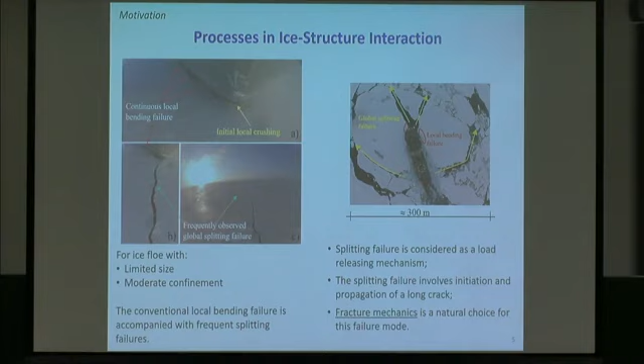So what can we then see? We see many different failure modes, not just one. If you look at the hull in the contact zone, we have bending failure of the ice. At the stem, we also have some crushing. In addition, there is splitting and circumferential cracking — all these things happening more or less at the same time.

And you see a crack running forward, as you see here. So if I take an example here from Oden in ice, you see a floe. This icebreaker is 108 meters long, so the floe is 200 plus. And what can you see when you are breaking forward here? You see a crack developing here, and another one here.

But what you should also recognize here is that there is a lack of confinement on this floe, which means that in the interaction zone, the stress field must clearly see or feel the boundary conditions. In addition, we have a local bending failure, as you see along the reamers here on the vessel. So I would say conventional local bending is accompanied by frequent splitting failures, as we see. And I'm more and more convinced that fracture mechanics is a natural choice for the failure mode here, so it's becoming more and more important.

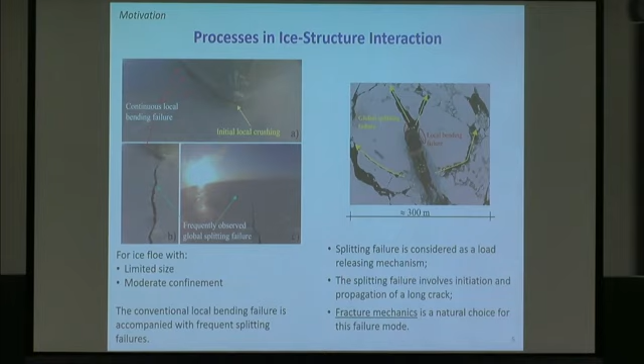And in our case, we are talking about this from the perspective of sea ice, which of course has salinity. It's more porous than freshwater ice, and so on.

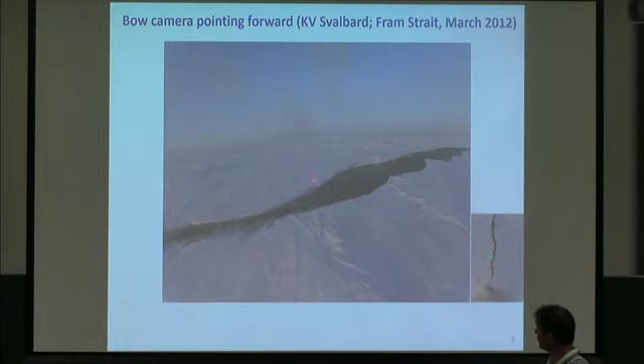On this slide, you see the bow of the icebreaker, and what you will see in the next seconds is a crack running from the bow here when we run into this floe and strike forward. So to let you understand, this is a bow camera pointing forward, similar to what you can see here. This is not the same crack.

I run it once more so you can better observe. I haven't exactly estimated the speed of the crack here, but we are talking more than 10 meters per second. I think we are talking about 15 to 20 meters per second on this crack running.

And what was characteristic, and what I said, was that there is a lack of confinement on this. It was just as you saw on the previous slide.

Now we are running into it. And you hear the rattling, can you hear it? And then we come - the temperature here is low. This is up in the Fram Strait in 2012. But what I would like to say and stress is that I see this kind of failure both in cold ice and in warm ice. So even if we had minus 30 here, this could very well happen at minus 5, minus 8, and so on as well. So that's what we see.

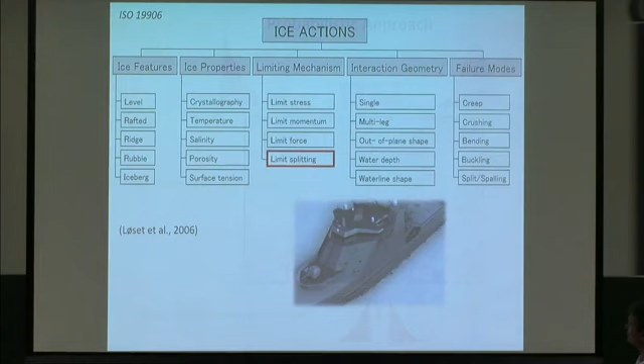So what concerns me with ISO, and I'm in one of the working groups there together with Bob Frederking and others, is that if you think about loading from this kind of perspective - say you have a probabilistic approach here, with a certain parameter which affects you, a distribution of that one, another one, a third one, and so on, and you need to create a parametric model here - what happens very often is that you take a deterministic model which includes one failure mechanism. So it means you go back and choose a failure mechanism, and then start calculating from there.

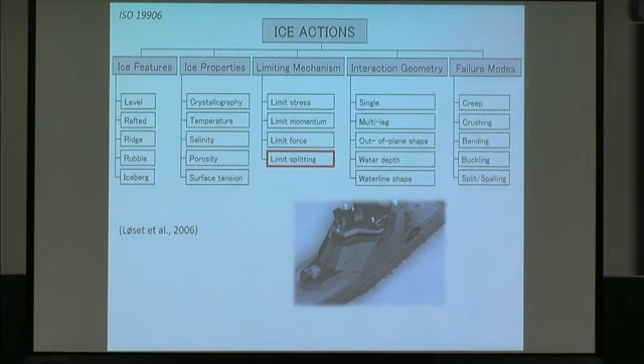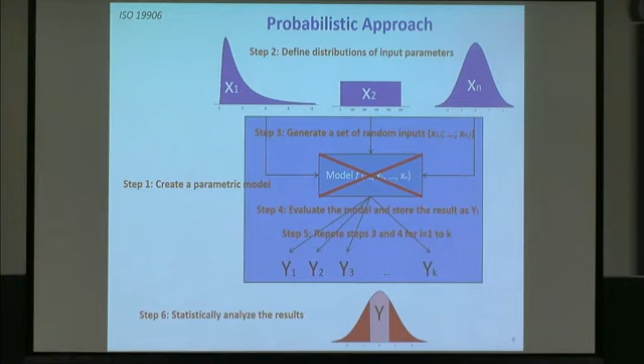And that's completely wrong, according to my vision and understanding, because that's not what we see. We see the combination of different failure mechanisms occurring more or less at the same time. So I would say the problem with ISO is that they have no proper model considering that. I won't go further into details here in this talk, but for me it's at least a major concern.

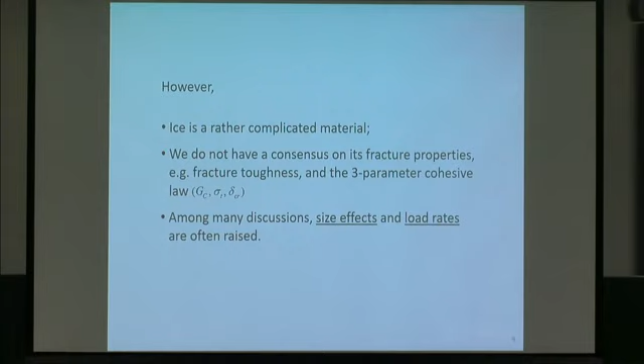But however, when we talk about ice and fracture as we are doing here, ice is a rather complicated material. That's clear, and we know that quite well. And if you also look at cohesive laws, or a three-parameter cohesive law with fracture energy, tensile stress, crack opening displacement and so on, then we do not fully agree on this, for sure. Among the discussions, we have size effects - how much can we rely on what we see in lab compared to full scale, and so on. How well can we do things in full scale? That's another part of it. And then also loading rates - is there any dependence there or not? So there are many things to discuss, which I will touch upon.

So the test we were doing, I will go a little bit into the test design. First of all, you have to consider size requirements here, like the length in the cleavage direction of your test divided by an average grain size, for instance, exceeding 200. I think that's common to say it should be more than that.

We could also think about the length here in relation to the characteristic length, as you have, and relate this to Mulmule and Dempsey in 2000 and so on. This is typically what has been considered there. So when designing the tests, we looked at a lower and higher value for the fracture toughness, leading to lengths in this scale, or if you go for a higher value, this is by Erland, and this is by John, for the fracture toughness, taking a relatively conservative value.

We would say that we need at least 3 meters for our experiments if we should think in this direction, as we should. When it comes to the loading rate, it's a little bit the same considerations with speed of what you should apply, and we went for different ranges because beforehand we didn't know exactly what we could need, for instance of temperature in the ice and so on.

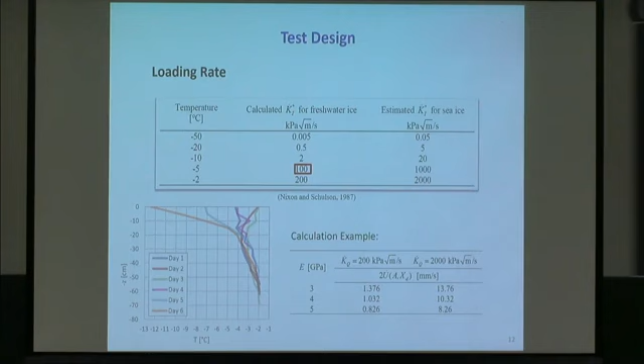So here is a profile of a typical temperature we had in the ice, which in this case for these tests here were about 60 centimeters thick.

Another thing I would like to say is that I'm very much in favor of a stiff system when we are testing, and we know that there are several jack loading systems based on hydraulic systems. If you should do that properly, you probably need to have a closed loop for the feedback and so on.

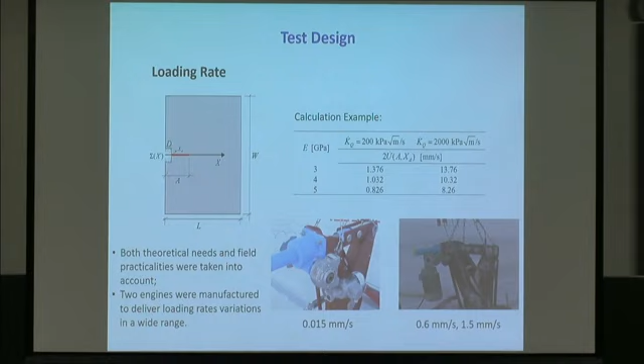So I've always gone for screw jacks with a high capacity, for instance from this engine here until the loading device, which is below here. We have a gearing of 1400, so I could actually turn this more or less with my finger, and in that case I know it will be quite stable in the speed, or independent of load. So we had speeds here from 0.015 millimeter per second to 0.6 to 1.5, so a factor of 100 from the lowest to the highest.

So what about the field tests in itself? I mentioned Spitsbergen here. This is the island, and Longyearbyen is located here. Our test site was in the south, about 60 kilometers from Longyearbyen, so we had to drive with scooters over here and do testing.

If I go 15 years back in time, I could have done tests here. But due to what we see, whatever it's global warming or whatever the cause of it, I don't discuss, we see that we have no chance to do proper experiments here any longer. We have no stable ice during the winter.

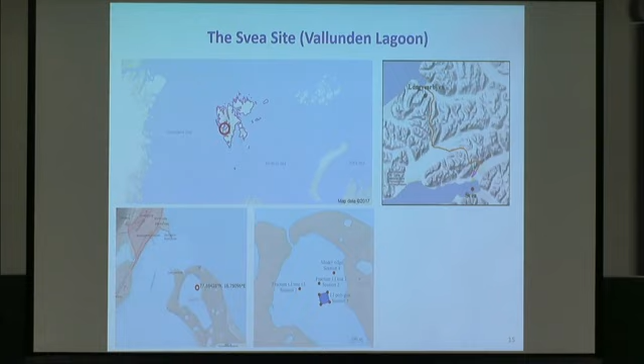And we went even further, because driving over and doing experiments in this area, we went into this lagoon, and it has exactly the same salinity as the sea outside, about 34 parts per thousand. No rivers flowing in here, of course. Then we have really stable conditions, which we were heading for.

So to come to that site, it looked very much like you see here, snow on top, and you need to perform something here which is both efficient and reliable, and also considering safety, which is quite important for us.

So here a little bit of the team. I think you can recall Yuka and Wenjun and John Dempsey. That's a part of the team which was there in '16. We started in '15, but we had some failure in the system there. So it was first in '16 we got proper results. And we can also add the team in 2017 with the equipment we applied.

So how did we do the experiment? I'm always in favor of having things where you don't need to rely on equipment that should be submerged. So we had a special design jack where everything related to the loading rate, measurements, and so on were above water. In front, we made a notch here in the floe and lowered the jack in so it could expand. I will show you that a little bit later.

Measurements were done of the crack mouth opening displacement here, and also what you have at the crack tip. So by keyhole test we know relatively well where the crack would go, and we did an experiment, and that was the way we designed it.

I mentioned this and I would also like to stress another thing. The device did not load the floe here. We had a crane up here, and wires or ropes going back, so we were sure we didn't impact or affect the loading on the floe.

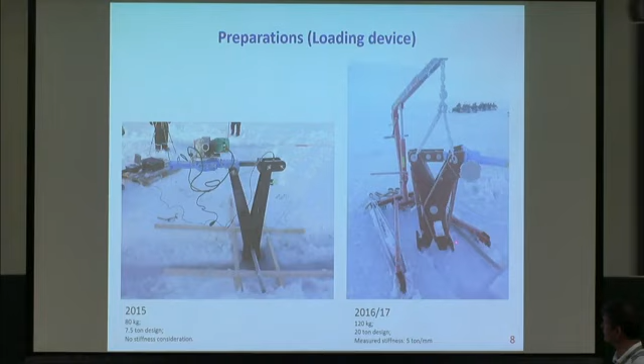So if we look at this jack, 2 plates, 200 millimeter high and 150 wide, with the jack working here and also a load cell, so we could easily lower this into the ice and start the experiment.

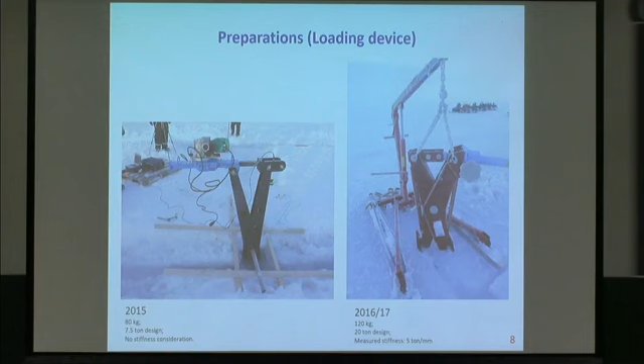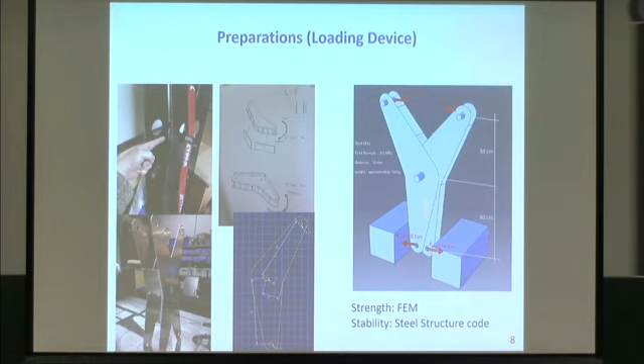It's also a matter of time. If you have an experiment which lasts very long or a slow procedure, after cutting the notch and preparing for the experiment, you will definitely affect the thermal conditions in the test area. Learning a bit from the preparations and from some experiments prior to this, we developed a jack here where you have the loading plates, and we could pull here instead of push, with a steel structure we designed to be efficient.

So what about the execution here?

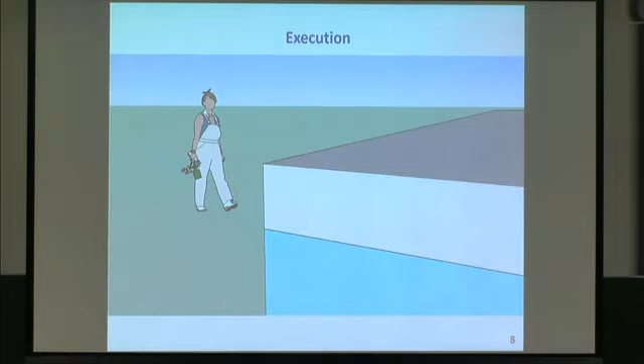Removal of snow, that's the first thing, of course. You need to have a bare surface, with different sizes, since I mentioned size effects if we want to study them.

Then there's also the cutting sequence, as you can see here. Typically this is 5 meter in the crack direction and 10 meter wide on the other side. It's important to do this in a way that is relatively fast.

A test was typically run within about 2 hours after cutting here. You can wonder why we could be so effective - I'll come back to that. Here you see this from another perspective.

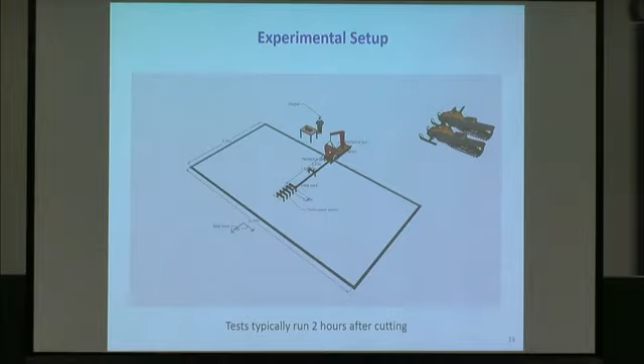And the instrumentation. So first, cleaning the snow - Jukka volunteered here, doing quite well.

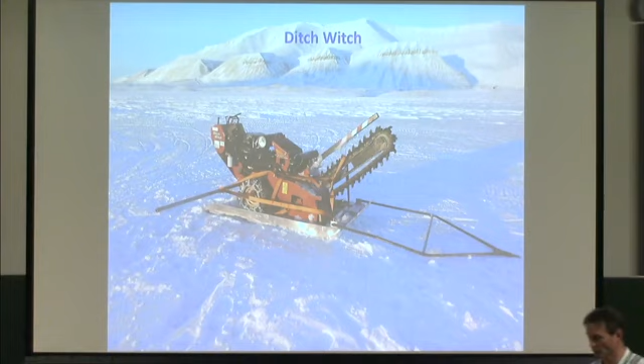But the most important thing here was an idea we borrowed, and we are really grateful for that, from John - a ditch witch. This was the major thing for us, meaning we could cut the ice at about walking speed.

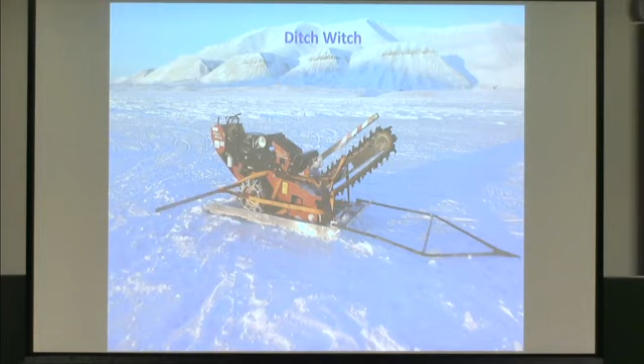Here is the device. We could pull this with a scooter from the land area over here. It's 520 kilos, and we could do it safely, chains on and so on. That was really great.

Then, prior to starting the real testing, we made a notch here - not for the crack, but for the jack to go into. A keyhole is made up here, and we were ready to do our first experiment.

This is back in '16, in order to see where we could expect the cracking - where we would expect the c-axis to be, or the basal plane, and so on.

Another important thing was this device we developed for measuring the crack opening when it starts, when you get the stress out here and the crack starts running forward. A neat device installed, mounted on wooden sticks in the ice and frozen in, so it was quite stable.

What about the instrumentation? Data logging at 16 or 50 Hertz - we found that could have been better, so we increased this to 1000 Hertz in 2017. We had loading rates from 0.015 millimeter per second up to 0.6 and 1.5 millimeter per second displacement.

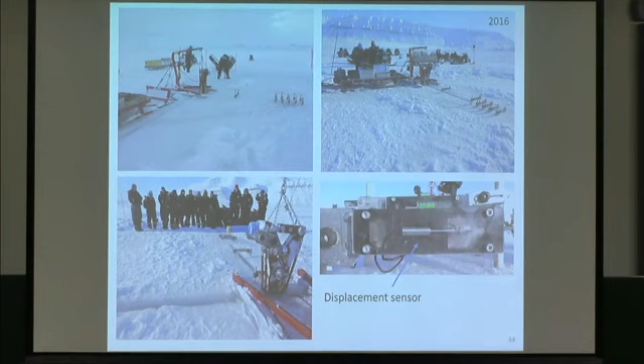We discussed a lot whether we should use optics, but we know that in Svea it's a damp place in relation to wind, meaning blowing snow along the surface would cause disturbance. So we went for a different device here, well protected, and that was a success, I would say.

Success and success - we always have to pray a little bit before starting, and Wenjun was hoping for the very best, as you can see here.

Yes, and then following up on the instrumentation is of course very important there.

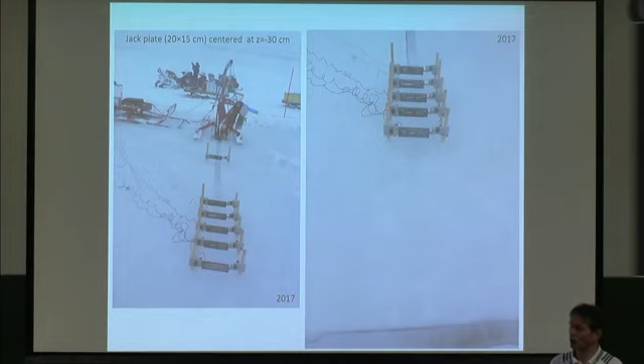With a little less light, but I think you're still able to see the crack running through the gauges here and up to this point, in this case when I took the photo, and later on it would proceed. But we could also stop a test in order to, let's say, capture the crack tip.

An example on that, this sequence is the following. We have a stable crack growth all the way. In this case, we stop the test, and this is not a keyhole test, by the way, for those who may think so.

This is just a sample, 4-inch, taken out from this section here, and what you can see, but it's not taken out here, is the crack tip which stopped here when we unloaded or stopped the test here. We didn't unload, we just stopped the test with the crack tip included, as we may consider here.

So what do we see there? This is the core which we have just pulled out here, and so you see the skeleton layer here, which is the lower part of the core, and we have the top here.

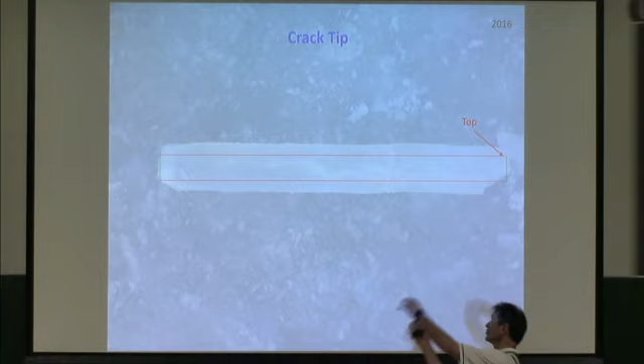So if you put the goodwill in here, you can see the crack here all the way from the bottom to the top of the sample. We stopped it just before and put the drilling in such a way that we kept this as one piece. So now we have a vertical core which we have just taken up here with the crack in, and then just put it on the ice and make this photo. So this is the core which was taken out from here.

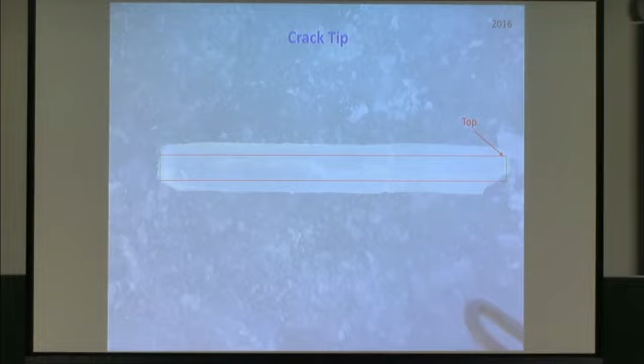Before you start the experiment, did you do anything to sharpen the tip? The sharpened? Yeah. I think I'll come back to that in a minute. If not, I will tell you about it.

So what can we say here about preliminary results? If you now take as an example... okay, I should probably immediately answer to your question. What we did here, if you see the jack is here, I can look at this one here, and the distance over here is 5 meters.

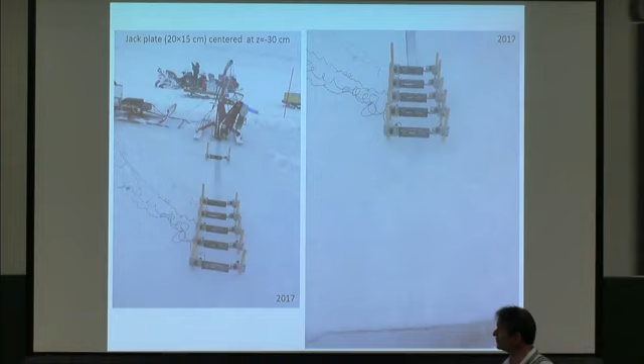So we used the ditch witch in to a certain distance. Then we used a chainsaw a little bit further, and then we went over to a handsaw, which was about 1 to 1.2 millimeter wide. And of course, it's very, very important that that is sharp, as we were considering.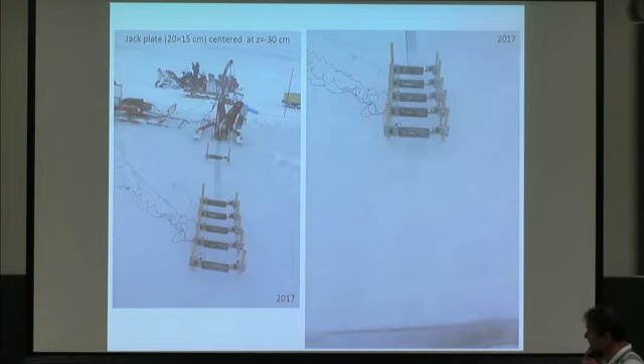So there was no way you could run this all the way. So we stopped well before we were afraid of interrupting the whole thing.

Wenjun, do you know where the video is on? What? Okay.

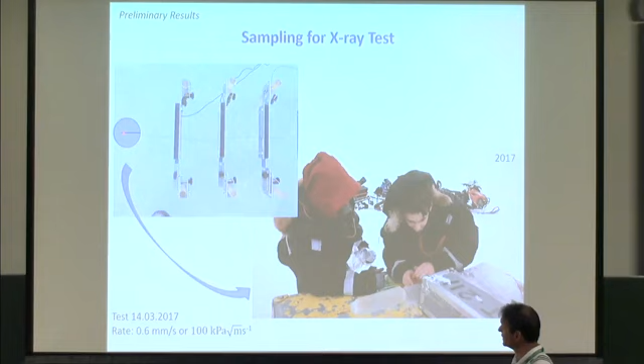So that was about the notch. So what you see here now is another core taken from the core tip, including the crack tip. You can clearly see this displacement sensor being measured over the crack, and of course also where you have the loading device.

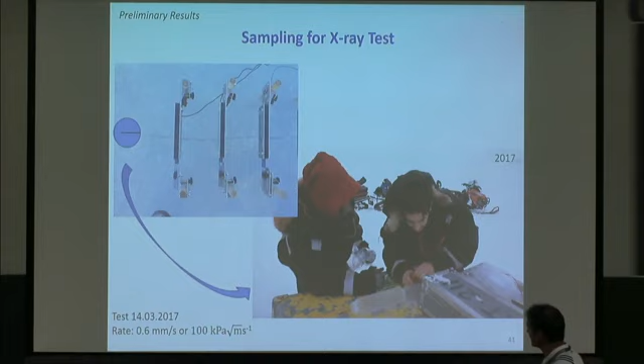For the result you see now in a few minutes, we have a loading rate of 0.6 millimeter per second. And in this case, we have a crack, the crack tip included in this core. So it's the crack or the core sample we have taken from what is indicated on the photo here.

We know, of course, if you start going back to theory here and so on, if you go to microscale wherever all the way down, you can consider the fracturing as breaking of bonds, either covalent bonds or hydrogen bonding and so on. Typically, if this was an ideally brittle material, you could have the fracture energy here related to the surface energy multiplied by 2.

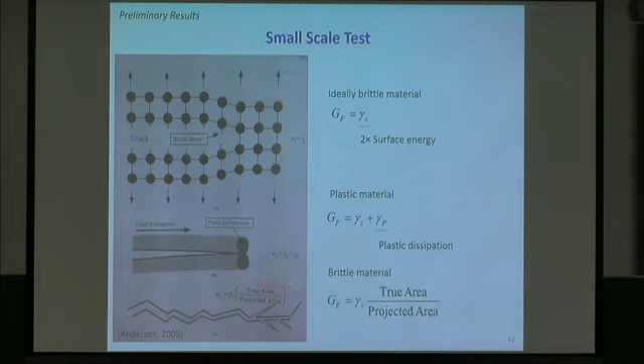But when we talk about a more plastic material, and we can't expect that sea ice is ideally brittle, you more have to consider that there are things happening in this area which is not just related to breaking up that ice you have. You have pore water in there. You have a porosity, which can be also relatively high in sea ice. So it's quite, I would say, quite complicated.

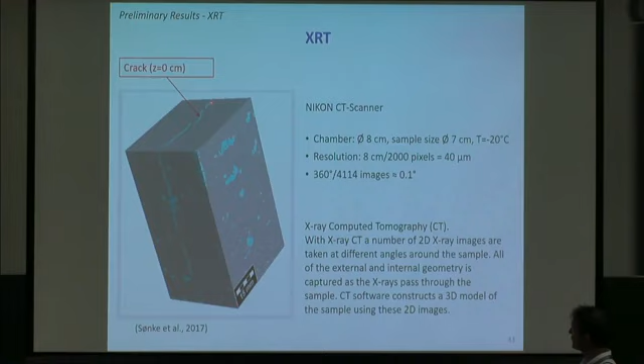So here is, from the core you saw now, here is an X-ray scan. I think this is from the core you saw in the previous slide. That means from the very top here, which is behind this cage here. We have captured the crack, but this sample didn't capture the very, very tip for the one we ran X-ray on. But I will show thin sections where we have that in.

So Z is equal to 0. That means we are on the surface. We had access to a chamber here, diameter 8 centimeter, and a sample size in this case of 7 centimeter over here, run then at -20, and this is of course in the lab at home.

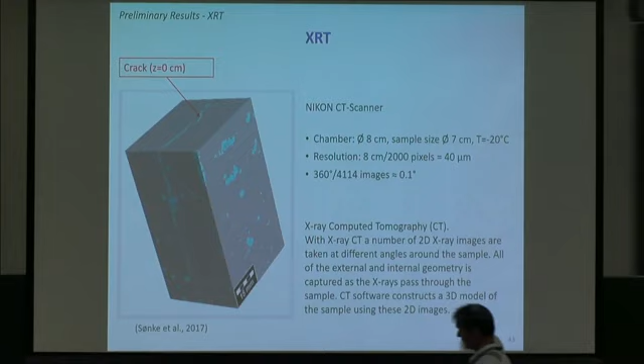And here we could slice up with 2D images which we put together into a surface which tells us something about the crack development and the crack surface. So by 2000 pixels here, we have a resolution of 40 micrometer. And the resolution here is then 0.1 degree for each slide we have in here. So from this, we could get a 3D model, as you can see here.

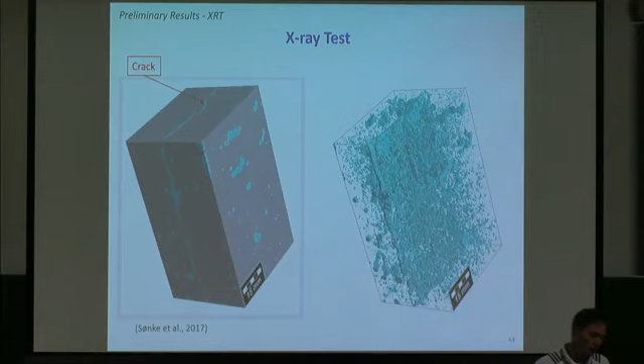You have less impurities, you have less pores and brine pockets in there, so I would expect that could be more plane. So it's developed all the way over here. What you can also see is that there are quite some inclusions here of brine pockets and air pockets as well. So there is a complicating factor. That's nothing to discuss, that's quite clear.

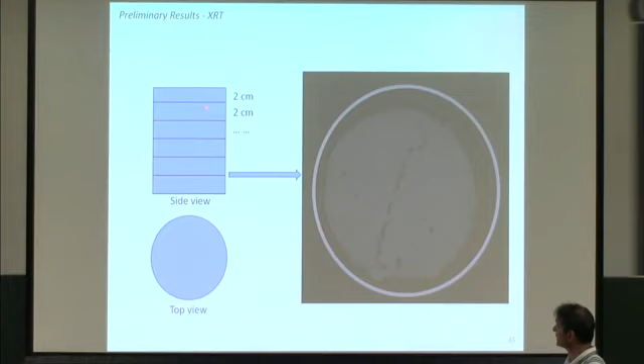If I now take this sample and then take a layer, integrate over 2 and 2 centimeter down the way, you will see a video now where you can see that. So the video will see now going down from the top of the sample here down towards the bottom of that sample.

And what you can look at there is details. If you look here from the top here, you see the crack is running in this way here up through the sample, and you can see here this is clear, the crack is going here, so this is magnified here, and you see also 2 lines going here, so this is a bifurcation here from this point and over here. And you certainly see that this follows weak sections, weak parts of the ice where you have, for instance, brine pockets.

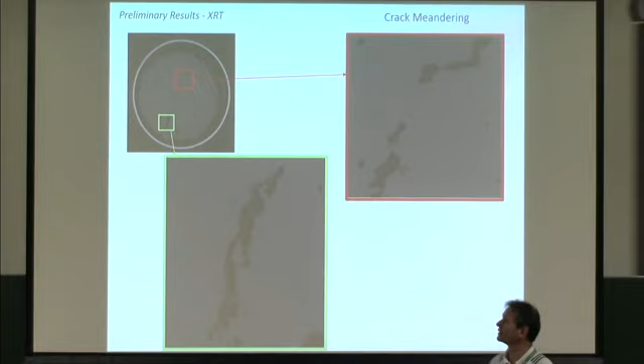We could take another part of this, magnify it as you see here, and you can see the same tendency here. So if I now go layer by layer, 2 by 2 by 2 centimeter down, it will look at, as you see here, okay, the crack is going here. You see also the brine pockets coming up and gas pockets and so on, but the majority is that we clearly can see that it's not fully continuous here.

You have certainly surfaces here that are intact in some way to some level, but then it's broken off in other places and so on. But in totality, of course, you have an opening here. You have an opening here, so it has to be broken.

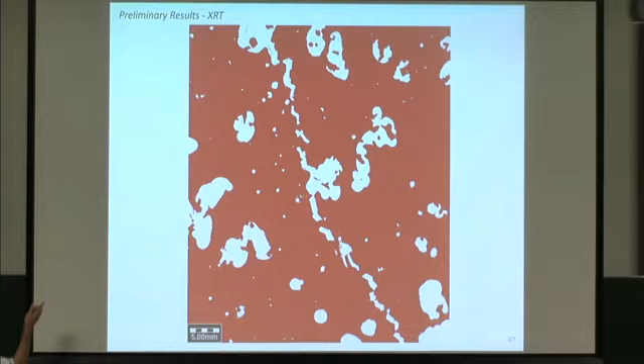And another thing I would like to say is that if you look at a crack like this, now to magnify it a little bit, and now we are diving down, that's what you see there. It is clearly that it's not straight as you think here. You see also deviations here at the crack tip. So just be aware of that.

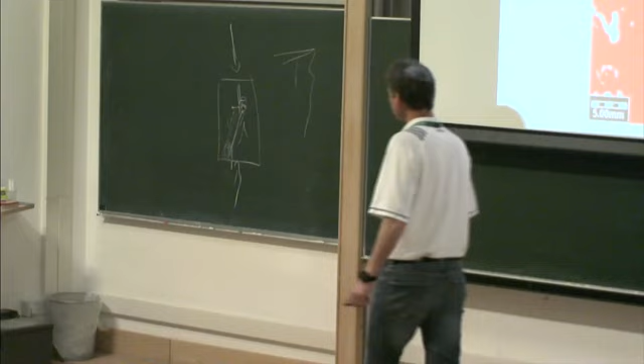So if you take just one thin section, it could be from the top here. It's not the whole story. Be aware of that.

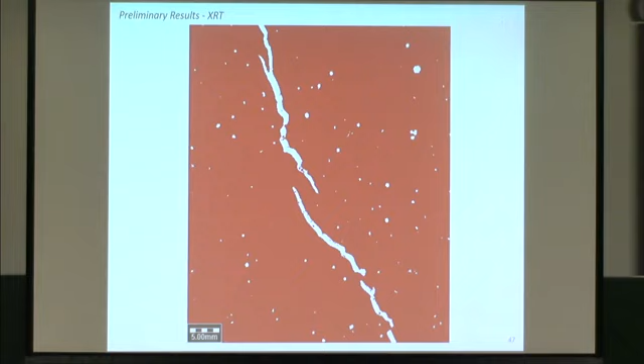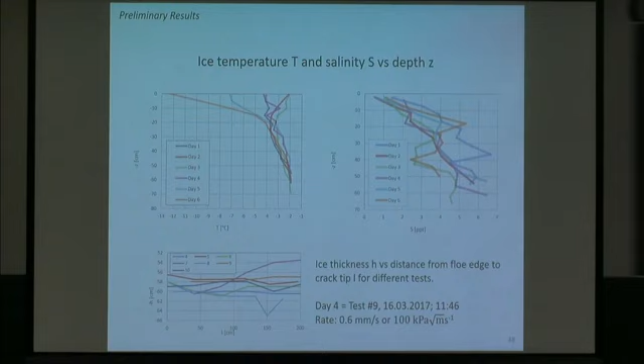If we go and look a little bit at one test here for that could be some thick and thin sections. You see this year and it was actually the same in 2016. The temperature in the ice was relatively warm. We can say that we have an average here of around maybe minus 4 or so. The crack was located here at this surface at this depth, 30 centimeter below. And if you look at this test number 9, we had a rate there of 0.6 millimeter per second and corresponding to 100 kPa square root of meter per second.

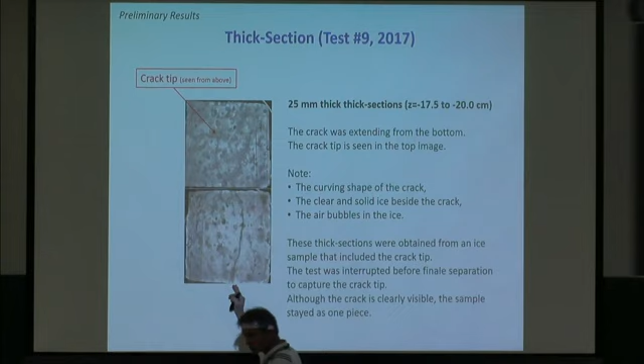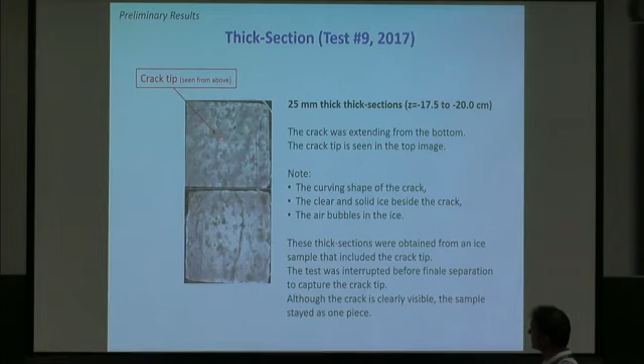Yes, so what can we see here? What is captured in this photo here? We see the crack is coming, running here from the bottom. The bottom means, sorry, from the bottom of the photo. It's running like this, and the test was stopped, or it was stopped in such a way that we have captured the crack tip, as you can see here.

And you can also clearly see some of the porosity here in the ice, the brine pockets and so on. What I can see here is that you can see that ice are fully in contact on sides here. So what can we say here?

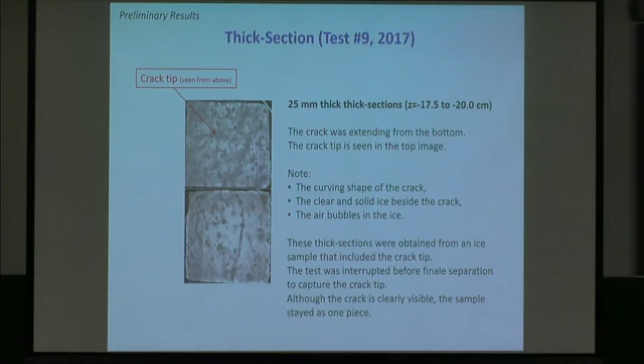Thick section obtained from an ice sample included a crack tip. We interrupted the test, as I say, and we can clearly see this crack being open from this way and forward over here. At this we will also look at a thin section going from thick to thin section.

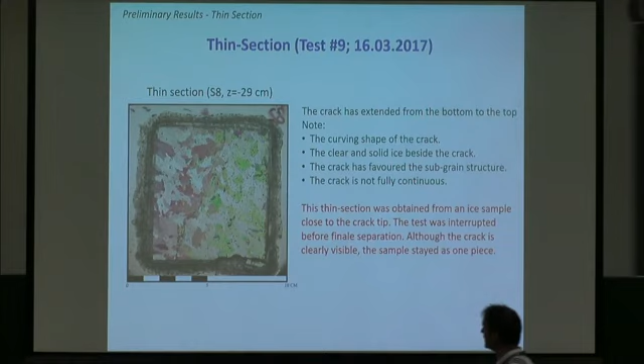At this depth of minus 20, or 29 centimeters from top down, you can see clearly in this thin section the crack running over here. You can also see that it diverts a little bit, goes around, clearly seeking for weakness in the ice. This is very close to the crack tip, so the crack tip is up somewhere here.

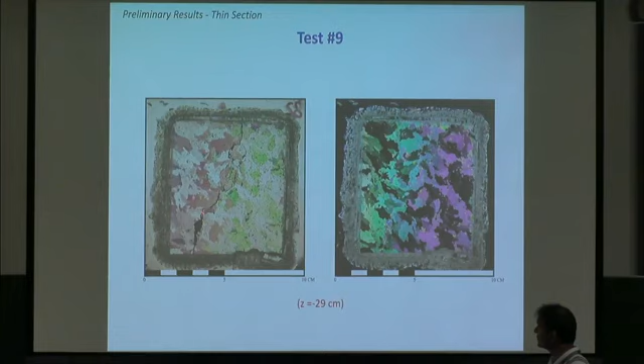We also see that it's not fully continuous the way we see it on this slide taken here. A little bit more information: you see it's quite open here, and clearly you are following pockets in the ice, or weak zones in the ice. You see here it's not bifurcation, I think we have 3 going and coming back together and running further up.

You can see more clearly the grains on this slide. Or if I go into this one, you can more clearly see the grains here. I haven't had time to calculate properly, but we are in the range of 3 to 4 millimeter average size of the grains. There's some statistics here. This is not diameter, this is grain area which is used.

And then we do of course have also information on the orientation here. If we look more closely here, we see the platelets. You can see that this is 1 millimeter over here, and we are now at the same depth. In this case, where this thin section is taken from, we can see that the crack has been running over here, so actually transverse over the platelets here.

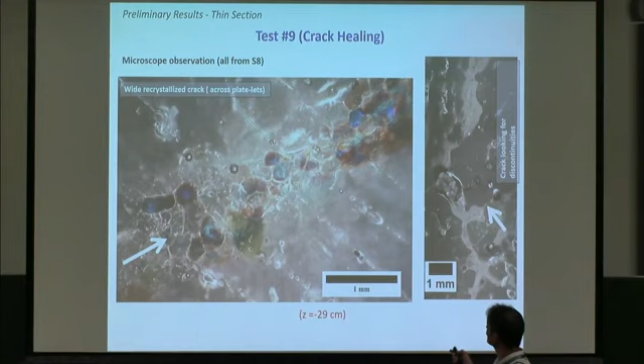But we can also see that it's refrozen. It's healed. As you can see, we have now more or less solid ice here, so there's recrystallization.

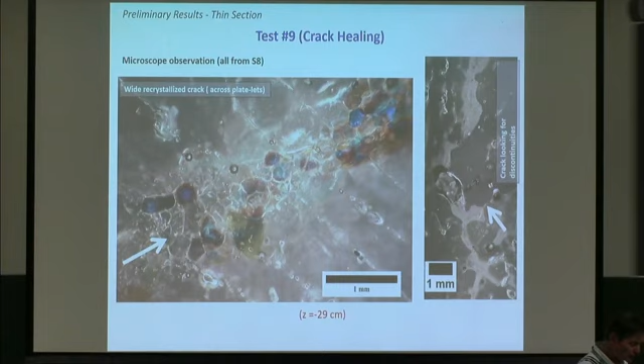If we look into this slide here, we can also follow the crack going around and up here and so on. So as Krzysztof said, the crack is looking for discontinuities in the ice here. This must be very different from fresh water ice, no question, and you can see that here as well. If I take these microscope observations...

We are at the same depth. We can see the crack running over here, and this is a void, a brine pocket, or could be gas as well, running further forward here, and up, probably looking for a weak zone. What you can also see here is that the crack is clearly transgranular, so it doesn't necessarily follow the grain boundary.

And we could start looking into the same here. I think you could get some minutes now, Wenjun, if you don't mind, and then we take the questions afterwards. But I will stay within the time, okay? By the way, there's a break afterwards, so it's not so strict.

These data are so fresh that we always say here preliminary results. We have not published them yet and so on, but of course it's coming.

Jeroen: I have a question concerning your observation on X-ray tomography, your very complex shape for the crack — could it be related also partly to some healing mechanisms between Svalbard and the X-ray chamber? Speaker: For the X-ray, we kept this cold all the way. Healing. So, yeah.

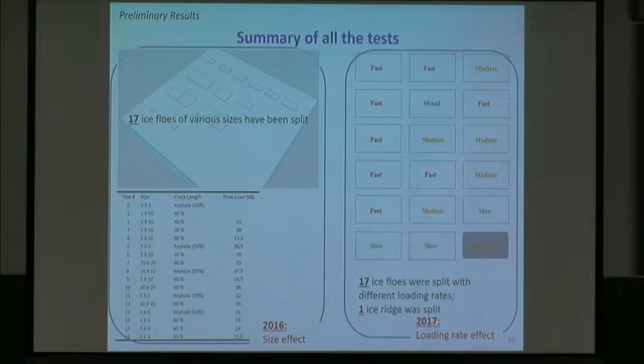And for us, we have only 34, but it took us 2 years to achieve this.

At first, about the size effect, we will just focus on this particular geometry, 5 meters by 10 meters. The initial crack length is about 60%, which is 3 meters. These are the peak force while we load the sample, and the force increases, and then it fractures. We recorded this peak force and plotted it here versus the size. They are all of the same loading rate.

I made a simple calculation based on linear elastic fracture mechanics. This is just to show you the geometry, there's nothing else behind it. After I plotted these things together, I couldn't hold myself back from plotting this simple line here. This is if it follows linear elastic fracture mechanics, then L squared to the minus 1/2.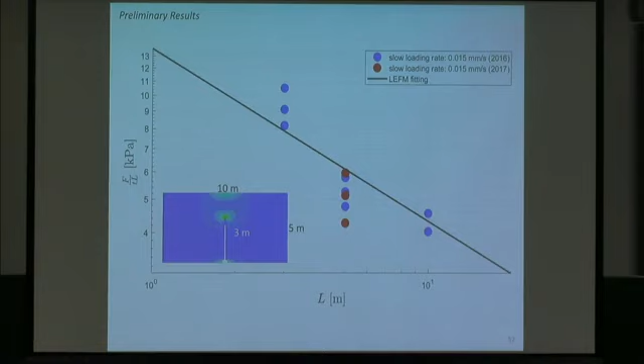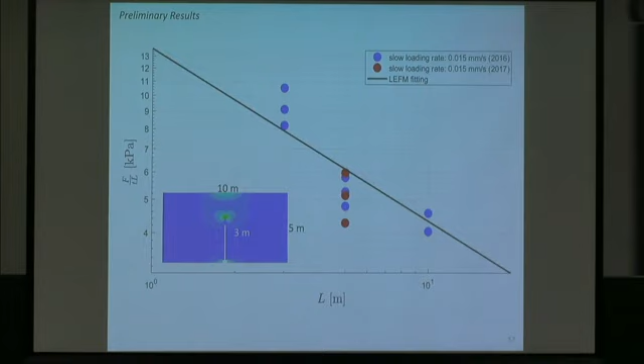Is this really following LEFM? There is some scatter. I don't know, but I will continue to present, and later I'll make a preliminary summary about this. In general, it looks good, it seems that they are following this inverse square root trend.

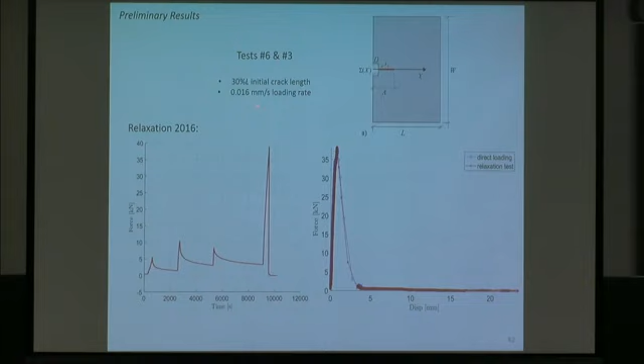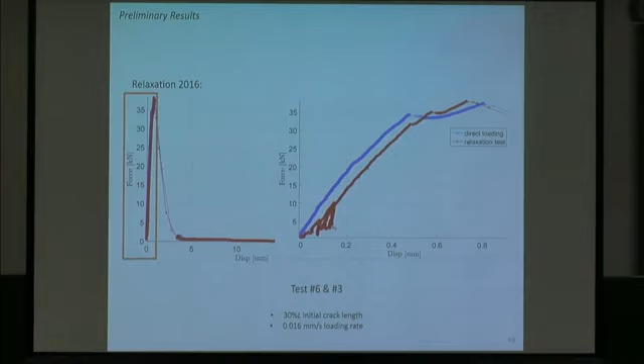This relaxation test we did in 2016 was done with a loading rate of 16 micrometers per second. Let's look further into this image, zooming in to see how this relaxation looks like. We have almost the same peak, and the trend also looks almost identical, except that for this red curve we have some back and forth of this relaxation cyclics.

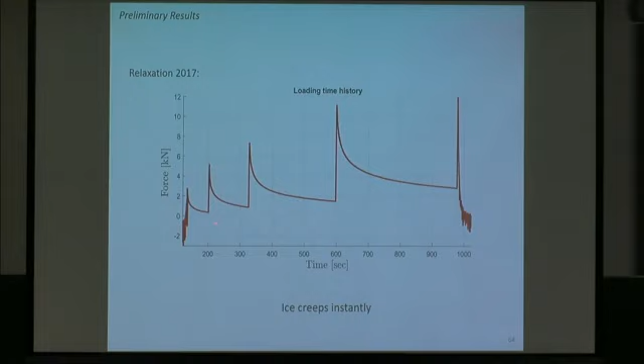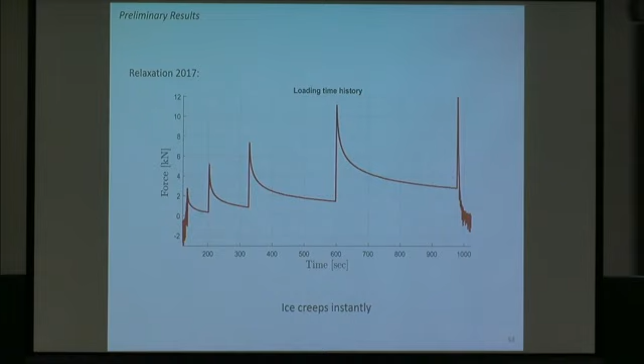In 2017 we did the same test but with a faster speed, 50 times faster. We load it up and wait until it goes down, then load it up again, waiting until it goes down, for several cycles until eventually we load it up until it fractures. Again the question is whether or not this peak force would be the same as direct loading or not.

I think my time is almost here, and I'd like to make some summary. Note that this is not a conclusion, because after processing these results, it seems to me that I'm just opening a can of worms. It's just more questions coming to me, and it seems like I can draw really opposite conclusions, going in opposite directions.

First, we can see that at the microscopic level, the crack really meanders and branches. But globally, it seems that the crack has a relatively determined direction to go. I have to thank John for this—he worked out this 2-to-1 ratio, which makes the crack direction relatively more controlled, such that we can capture it by our sensors.

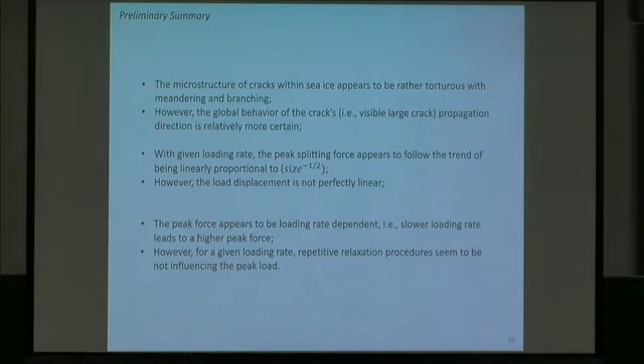Regarding this size effect, it seems that given the loading rate, the test data does pass through this size relationship, the square root inverse size relationship. But it seems that load displacement is not perfectly linear, and they are time dependent somehow.

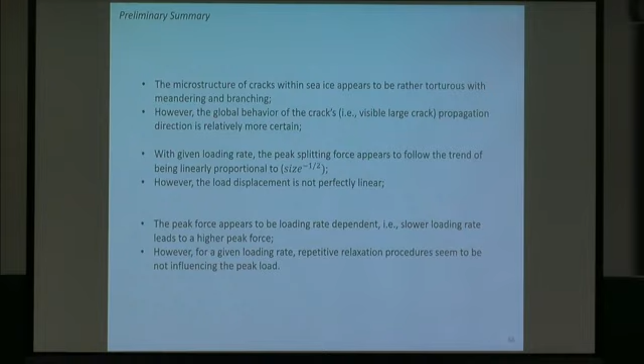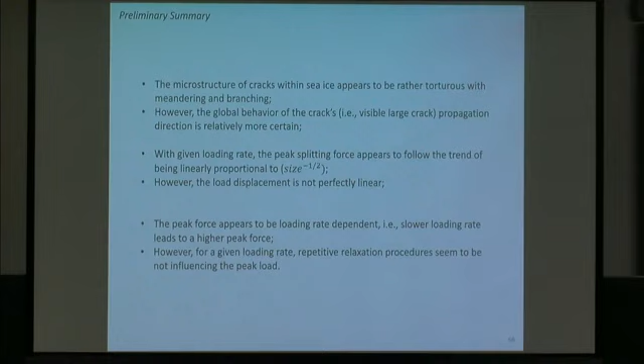Also regarding the peak force, it appears to be loading rate dependent, judging from all these tests we find out. But again, if we consider this cyclic loading, where we really wait for it to heal or creep or whatever, it seems that it's not influencing the peak load. So these summaries are just opening all these questions to me.

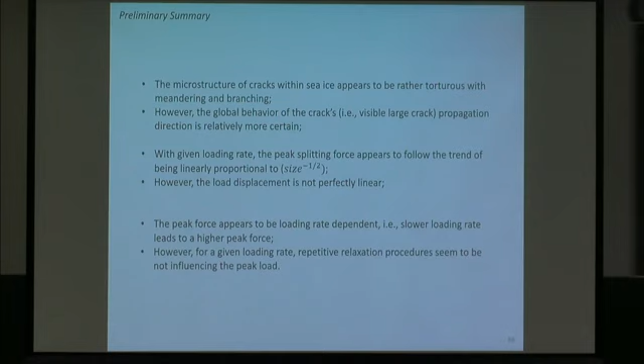What I plan to do is find a time-dependent material constitutive relationship and model to see if I can match my measurement. Okay, I think that's what I want to say. Thank you.

Just on the loading, how well prepared was it? The discrepancies are suspicious, and it kind of reminds me of equipment type issues. You mean about the stiffness of these things? Well, what discrepancy though?

I can go back to this load displacement. Well, your conclusion was that you were surprised at the result that with the same or different loading rates, you were getting the same failure peak stress. Different loading rate seems to give me different loading peaks. But on the other hand, for the relaxation test, we get the same load peaks, irrespective of how many cycles we are waiting for until we load it until it fails.

Well, the thing I was wondering about was the plates. Like you have this device that applies the load, how well prepared are the surfaces that the plates are pushing against?

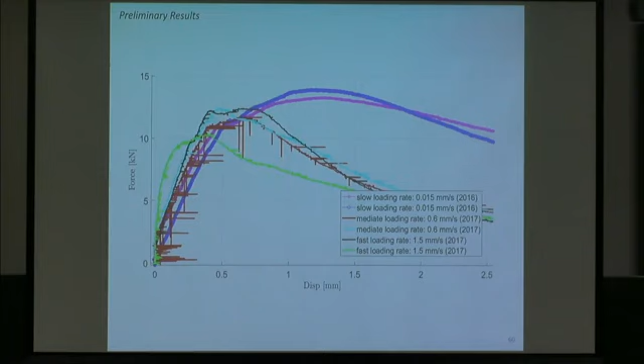Could you do some kind of t-test on those numbers? Some kind of statistical test that tells... Not yet — it's very raw, very fresh data that you're looking at. I would do a t-test, some kind of analysis, but not yet.

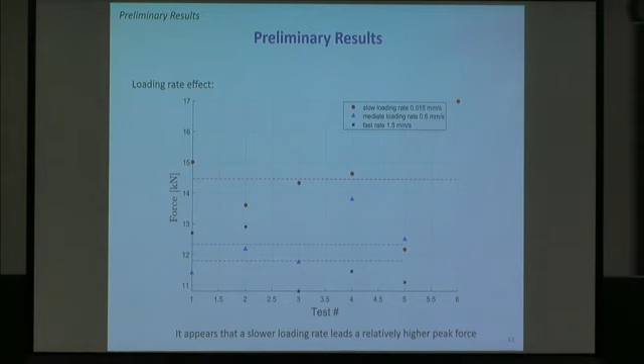Chris: So sort of following up on that, actually, I've done hundreds of loading rate tests with snow samples in bending, and I see the same thing. I see higher peak loads for slower loading rates, and it is consistent and it is statistically significant.

And it seems to me that the answer does lie in some sort of, at slower loading rates, you've got a little bit of creep deformation at the crack tip. It's competing with the sort of crack growth, kind of like you described earlier, Erlen. I think that's the explanation for why you're having to put more energy in, because you're dissipating a little more at the crack tip at the slower rates.

Victor: Well, sort of related to that too, do you know if there is or is not any deformation ahead of the crack tip before your decrease of load? There is some deformation because we have 4 gauges ahead of the crack tip. Before it fractures, during the loading up, we obviously see that those sensors are also being activated — there's opening, there was some displacement. Not much, but some.

That's also the reason we want to use those data to back calculate this cohesive law.

Once again, about this loading rate effect, and in relation with Chris' comment — maybe could you try to quantify on your loading curve the deviation from linear elasticity on the loading part of the curve, and then try to correlate that with the peak stress, because if you have another mechanism which is not elasticity, like creep or dislocation, plasticity, and so on, it should have something which deviates more from linear behavior. So you might try to quantify that.

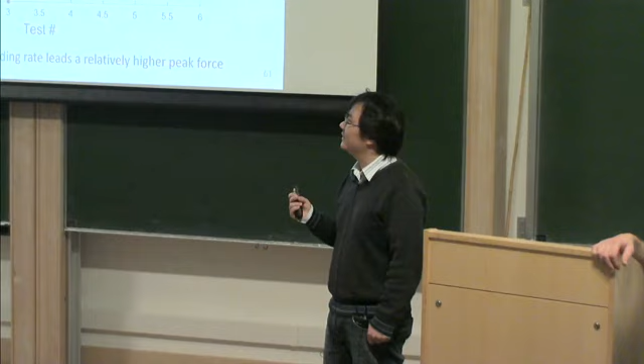Part of this work, John did in 1998, right? You were trying to use linear elastic, linear cohesive fracture mechanics to match your result. It turned out the linear elastic model doesn't really match up. You need a viscoelastic cohesive crack model — so you've got to subtract the creep deformations from the total deformations, and then you can match the fracture deformations.

And actually, in my talk tomorrow, I'll show the results of some Arctic and Antarctic tests. That is a preliminary to what Wenjun must do.

Going forward in time, we will also bring in previous experience — we have a PhD student here at Aalto, working with John and myself. We have Yuko and Wenjun. So we are really just starting, and that's why we have preliminary results shown in the upper left corner. But we wanted to show them so we can have some discussion around it at least, and then come back to it.